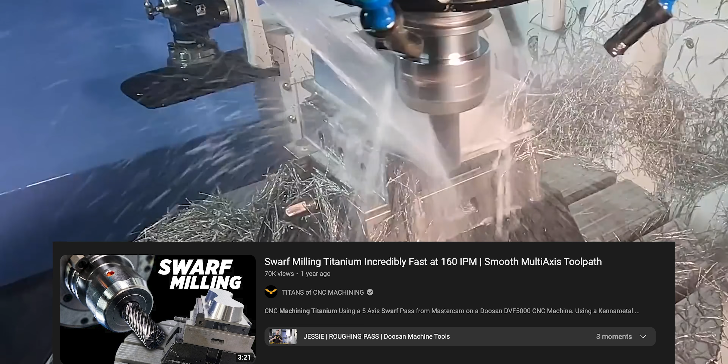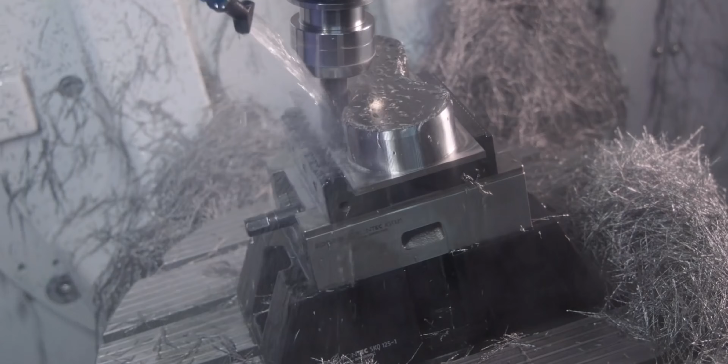Titanium, one of my favorite materials to machine. Been machining it for like 17 years. A lot of you guys know the story. Went down to Schilling Robotics. They had all of these ROVs, remote operated vehicles. They went to the bottom of the ocean, all of these crazy titanium parts. At that time, I was machining steel, all different types of stainless, plastic, aluminum, all that. But I just had never got to that level to have customers that wanted to give me titanium.

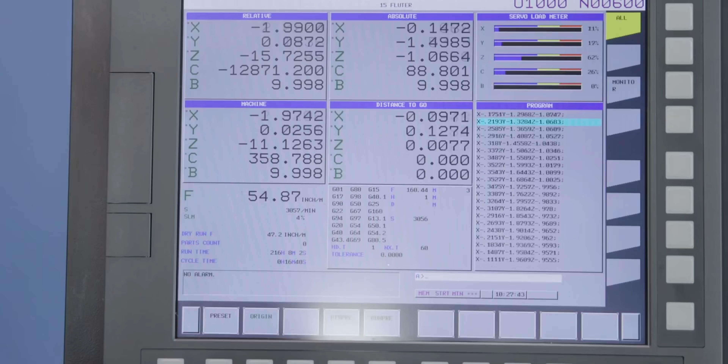I walked out that day with what they said was almost an impossible part. And they asked me, hey, do you know how to machine titanium? I'm like, I will get it done. And I walked out with this crazy job knowing that my entire future was on the line. If I could actually make this titanium part and make it in such a way that the flatness was perfect with all the pockets, there was no bowing, the O-rings, all perfect. If I could actually make this part, this company would actually fill my shop up with work. Everything was on the line.

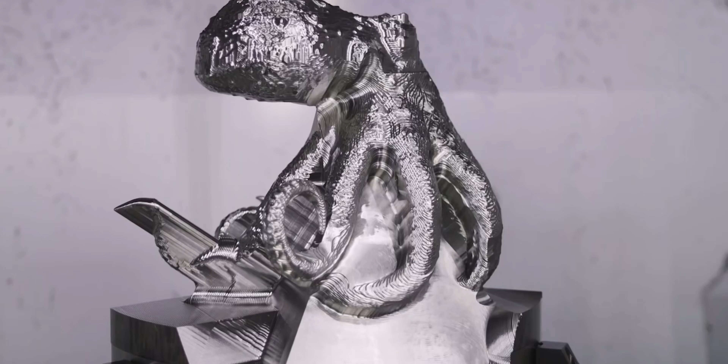Went back to my shop 17 years ago and Googled titanium. How do you machine titanium? And at that time, there was no videos, no YouTube, nothing. I was calling people. I was trying to figure it out. And I spent the next 2 weeks working on this crazy project, some failures, some successes. But at the end of the day, I went back to Schilling Robotics, delivered an incredible part to spec, perfect

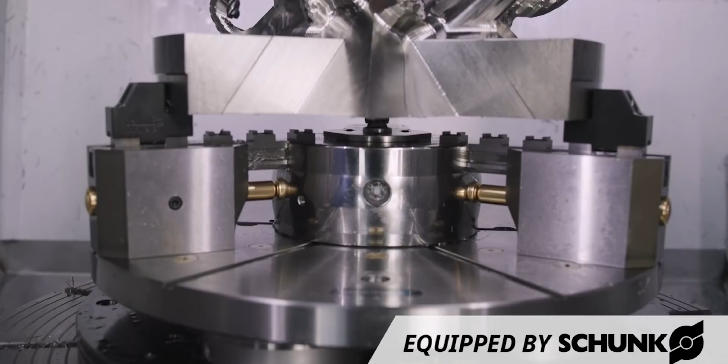surface finishes, and that job changed my entire life because the owner looked at the part, inspected the part, took me to the buyer and said, you know what? Give this guy and his company as much work as they can handle. And in an instant, I had quote after quote after quote, and my entire company changed. The type of work that we did, the complexity, the tolerances, all of it changed in a single day.

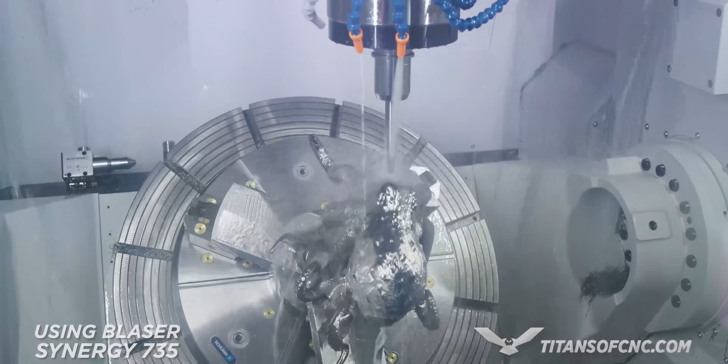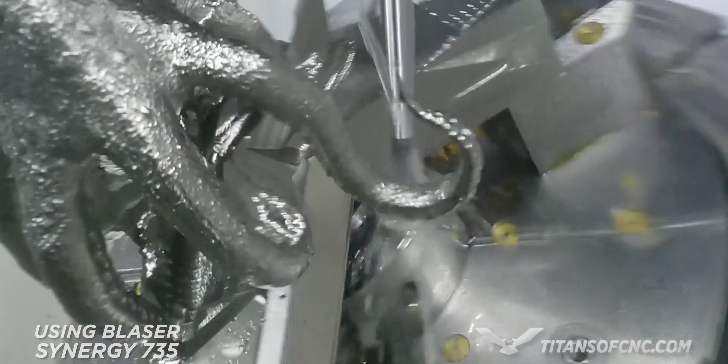Now, it's been 17 years since that day, and we've made incredible parts, over 3,500 part numbers for SpaceX from 2007 all the way until just a couple years ago when I decided to go full education to teach our trade and lift it all up. When you look at Blue Origin, a lot of people don't know, the BE3 engine, we actually machined 70% of all components on the prototype and for a season made all those parts.

And that's why I love this YouTube channel. Because there is a community. You are out there. I get to speak right into this camera and just instill knowledge into you guys. You guys don't have to reinvent the wheel. Instead, look at all the videos, look at the process, keep a book and document everything that you guys see. Speeds, feeds, depths of cuts, surface foot, chip load, all of it. Document it for the different types of materials and bank that information. When we talk about programming, look at the techniques, document it, save videos, and when you have a similar part, you can go back and actually see what we said and what we used for reference.

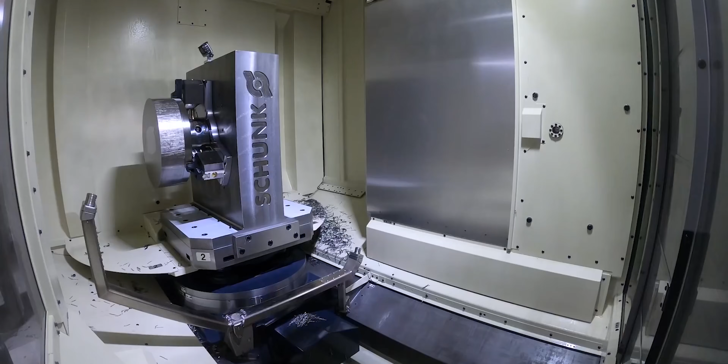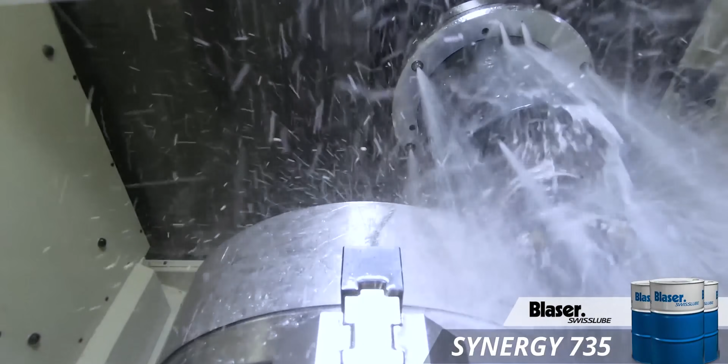All right, back to giving you guys some info. Now, as a machinist, looking at titanium, you got your plastics and different types of plastics and exotic plastics. You got aluminums, and it's not just 6061. You got 7050, 7075. Each one is a little bit different, right? 6061 is annealed and you can just blow right through it.

But when you start doing aerospace work and you get into the 7050s, then it's a little bit gummy and you're having to slow down a little bit, take big cuts, but you just can't approach it the same way. Now, you go into your steels, you go into your stainlesses, and you start elevating up. And then over here, you actually have your super alloys and your hard materials, your A286, your Inconels, your Monels, Hastelloy, all that.

Well, titanium sits right here. Probably on the whole range of everything I've ever machined, it falls right at about 60% on the range.

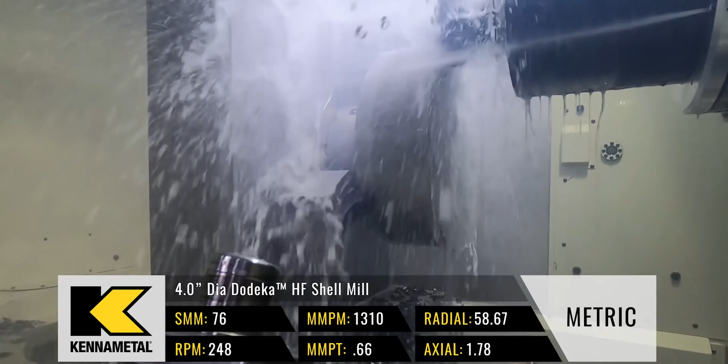For me, I just want to talk to you guys about technique. Now, when machining titanium, there's probably 4 different things that I'll talk about real quick. First is rigidity, all right? You have to have a rigid setup when you're machining hard materials. You always need a rigid setup, but especially when you're machining hard materials, you need to make sure that there's no vibration in that work holding.

The second would be the technique. How are you approaching that cut? Now, I always tell people, back in the day, we would use a corner of the tools, right? And we'd take these cuts and there'd be deflection. But today, the style of cut is different. We actually drop down and take a smaller radial, but we take the full Z and we allow the pressure to stretch across the entire end mill.

Even when we're coming into the material, we're never coming at a 90. I'll actually come in and just taper it straight inside, boom, right into the cut so we can just keep going. So it's gradual. Instead of going here or here or here, you're actually more like here, looking at the material that you have, and you're just gliding in. So you're walking into the beach, into the water. You're not jumping off the dock, right? You guys have heard me say that term.

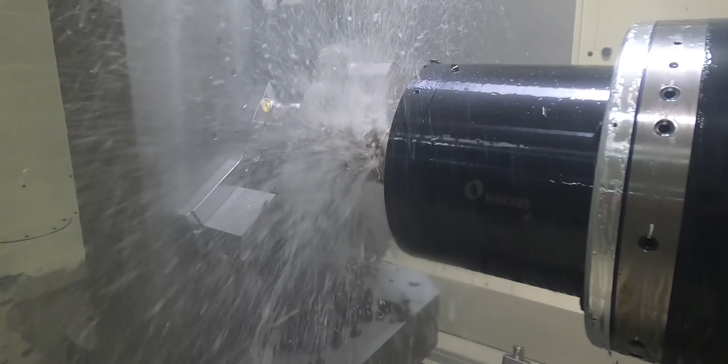So pressure is everything. Tooling is everything. Technique is everything. Get that technique, have the right tool that's nice and rigid, that can make that cut, that's not gonna wear out.

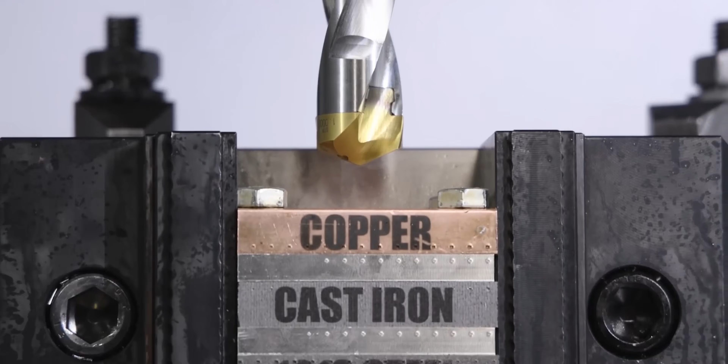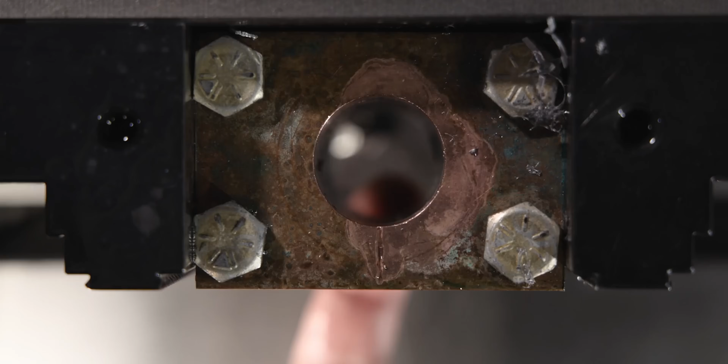So when drilling, in our videos, we're always putting the surface foot, the feed per rev, because we're drilling, and we're always giving you that information. And we don't just run one hole. We'll show you a whole bunch of holes, and we'll talk about tool life and how time is money in this trade.

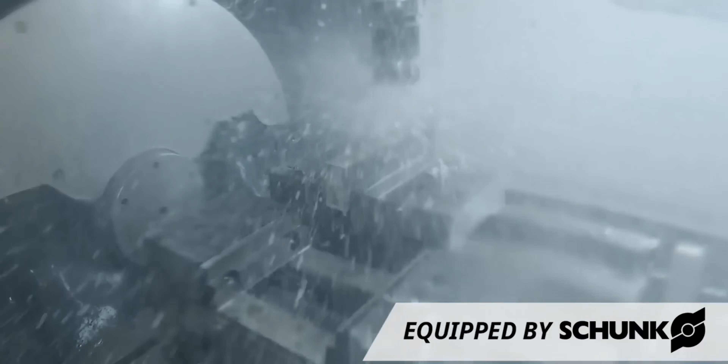A couple questions came up in my recent Monel video. People were asking, hey Titan, you always use through the spindle coolant, and you just take these cuts all the way down without stopping. And that is absolutely true. Because of the way the drill actually breaks that chip, we're able to do that because of the tooling.

Now, somebody asked me about pecking and what if you don't have a coolant through drill? A lot of times as a programmer, I just use common sense. I take an artistic approach and I think about the part, the material, the holes, how deep it is, and the coolant and the chips and all of it. When you're cutting Inconel and Monel and A286 and even titanium, you're dealing with hard chips.

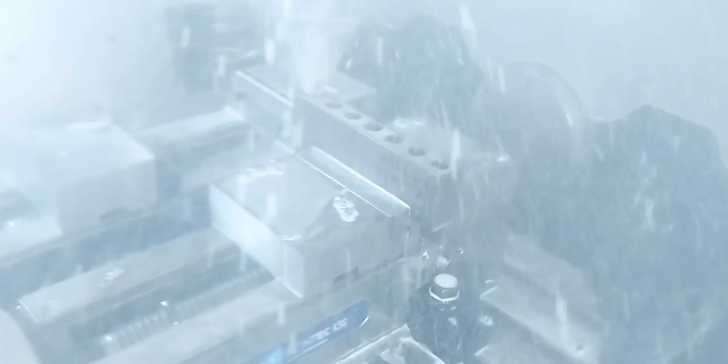And if your tool hits the hard chips wrong, your tool life's gonna actually suffer. I like to feed in with the high pressure and allow the chips just to evacuate, just keeping that coolant, that liquid tool, flushing at 1,000 PSI.

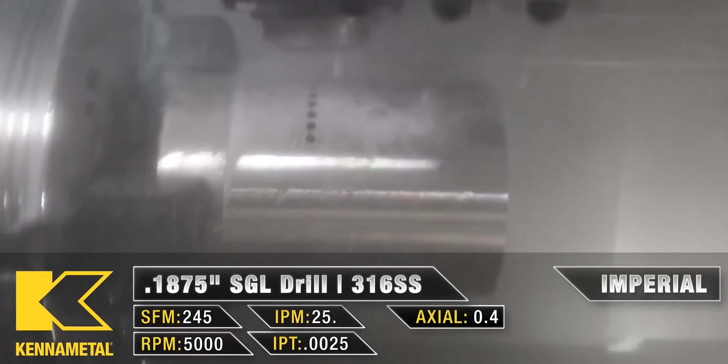And if my hole is really deep, a lot of times I'll go in and I'll actually change the program by hand. And instead of doing a little chip break like a G73, I'll take more control over it. I'll actually come down and then I'll just retract about 10 thousandths, boom. I'll put in a quick little dwell and I don't allow space for chips, but I allow the coolant to work. And then I just go again, another inch, 2 inches, ½ inch, depending on the process.

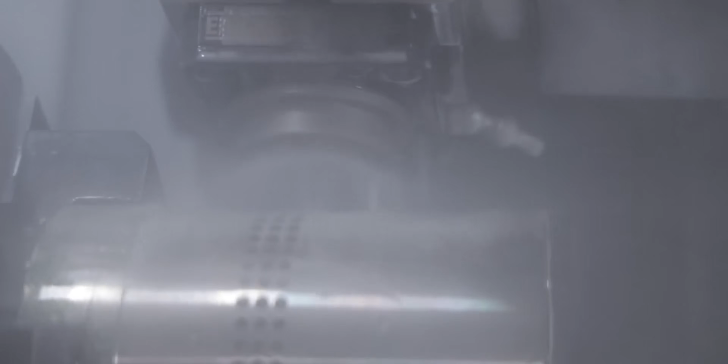And I'll actually just retract like 5/10 thousandths. I'll do a little dwell, I'll let it flush, and I'll just keep going. So depending on the material, depending on how your chips are breaking, depending on all of it, as a programmer, you just gotta figure it out. And that's what separates great programmers from other programmers. That's what separates people that make great money in this trade and those that don't, is your ability to outthink the competition and figure out how to make parts run as efficiently as possible.

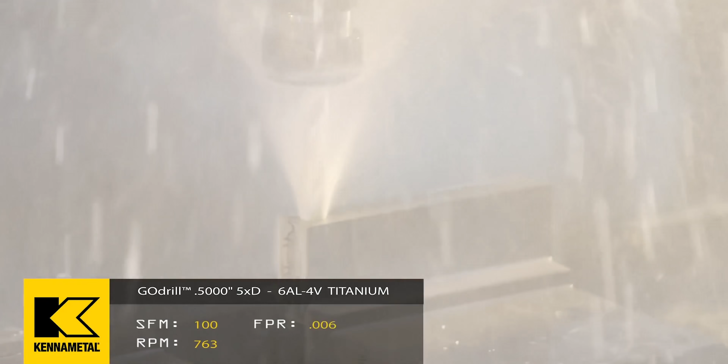Now, if you didn't have coolant, my advice would be take smaller pecks. So if you had a GOdrill without coolant through holes, I would make sure that my coolant level is at least 10 to 12%, so you got that lubricity. If we're running aluminum, we're probably at 7%, but super alloys, titanium, hard steels, let's keep it about 10 to 12%. The variables, right? I'll actually come in and take small cuts.

I'll come all the way out, but instead of rapiding back in and maybe hitting a chip that didn't get evacuated because you're too deep in, I'll actually feed. So if I'm at like 4 inches a minute or 6 inches a minute coming down with a nice drill, I'll actually feed at maybe like 20 or 30 where it's still going, but if you hit a chip, it'll actually just rotate on the drill and not break the drill or cause damage to the tip. And then I'll come down right before the bottom surface, and then I'll just start feeding at my regular feed. I'll do that, boom, boom, boom.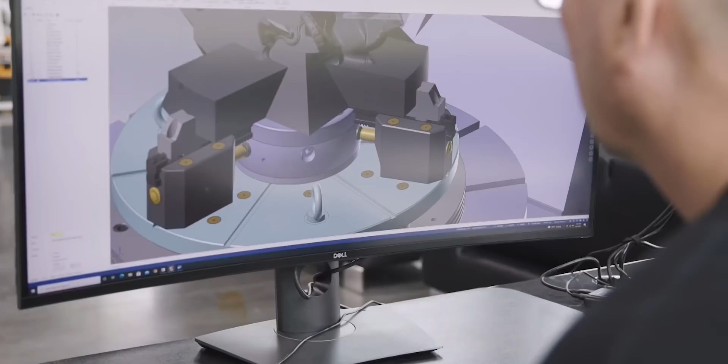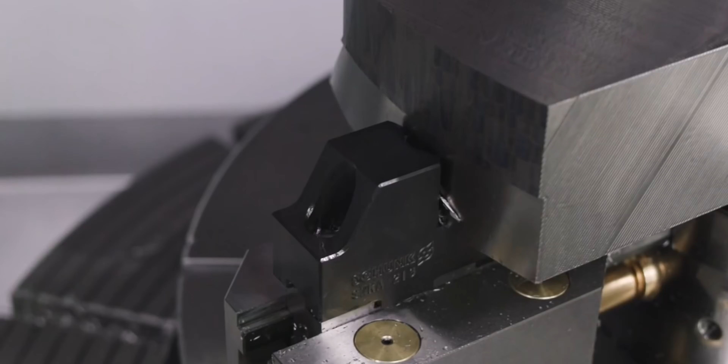A lot of times you can program that in your CAM system. Sometimes you just have to do it by hand. Sometimes if you have a bunch of holes, I'll go into the program and make this little adjustment, and then I'll just drop it as a sub program, like on an M97 or even an M98. I like M97s a lot because you can actually keep it within the same program, then you can just drop down, boom, boom, boom. Difference between calling a sub as an M97 is that it starts with an N value. M98 actually starts with an O value, which separates the program from your main program.

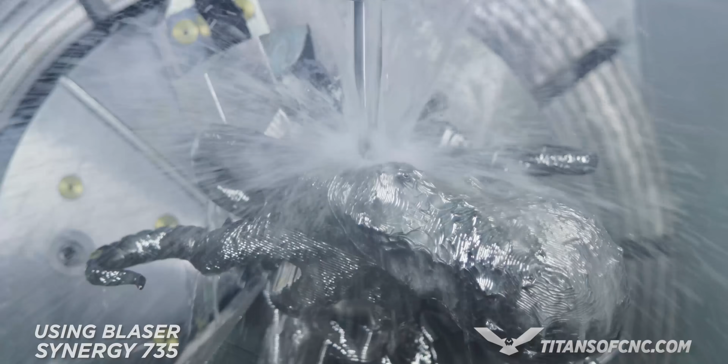But I'll basically just make that little guy. I'll make my little sub, and then I'll just come up here and call it incrementally like 10 times out this way or whatever I have to do at the top just to get to position. Even at the bottom of the sub, I'll actually come up and move over, just so every time it does it, I can call up that M97, call up that sub, run it a certain amount of times. In the sub, it'll actually come up and move over on its own if it's equal distance and stuff. Programming is so awesome because it's your mind and you are dictating the pace.

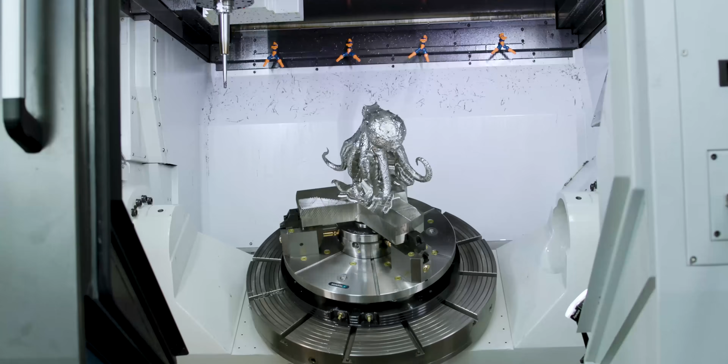And if the part is inefficient and the part sucks, it probably has to do with you or your inability to get good tooling. But when a program is amazing and the work holding is on point, and most important, you have all variables working together at a high level. When I say variables, I mean spindle, work holding, the material, the tooling, the approach, the coolant, rigidity, and all of it. You have to take all of it to the highest level.